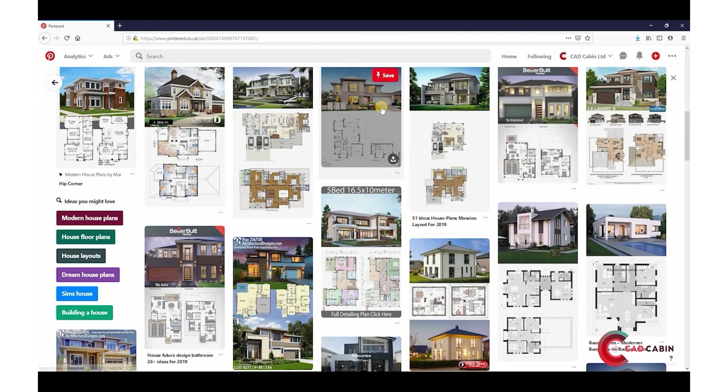In this video, we'll try to copy a design from Pinterest and make your own house plan in this software. Go to Pinterest.com and search keywords like two-story house plan UK. Search for a pin that you will copy and use as reference in designing your own home. Find one image and we'll start duplicating the design into our software. Let's say you want to copy this design easily.

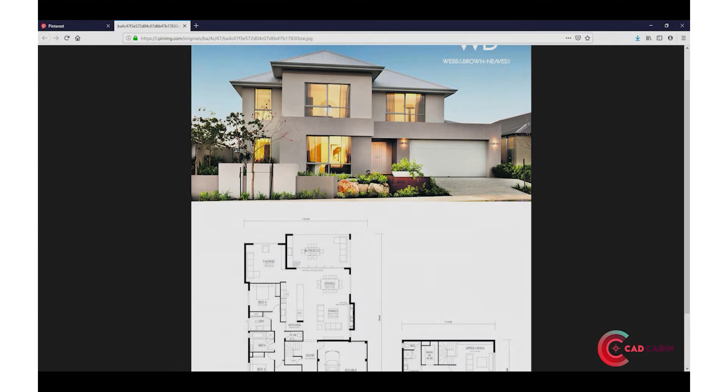This is a two-story home with carport. Now we'll switch to the program and start by drawing the plan. To start, let's draw the exterior walls.

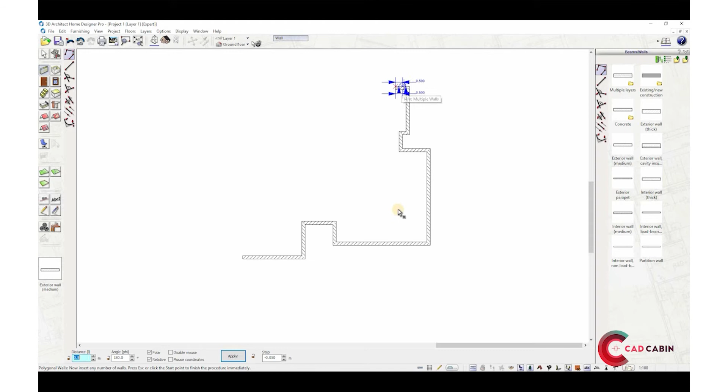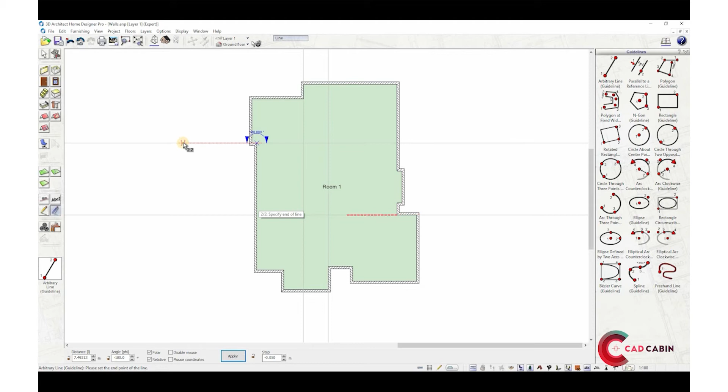As you can see, I used guidelines to align the walls, ready for interior walling. To use guidelines, click on the Guidelines tool at the lower toolbar, then set the reference point. You can rotate the line 360 degrees, or either vertical or horizontal. Another click to fix the guideline.

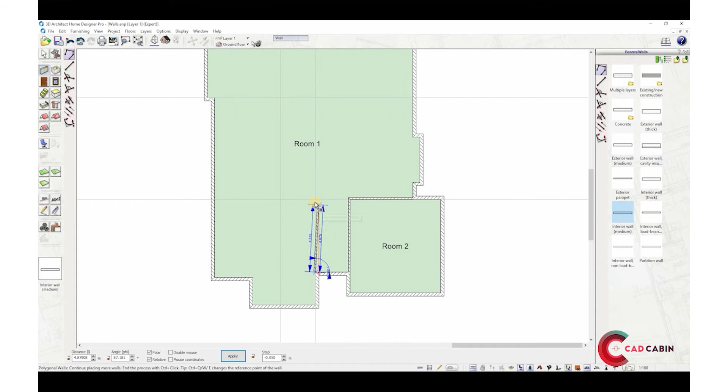After creating a large room, next draw the interior walls. You can add your bedrooms, bathroom or any room according to your desired size. Just click on the wall starting point, drag and click to end the wall. Continue until you have completed all the interior partitions.

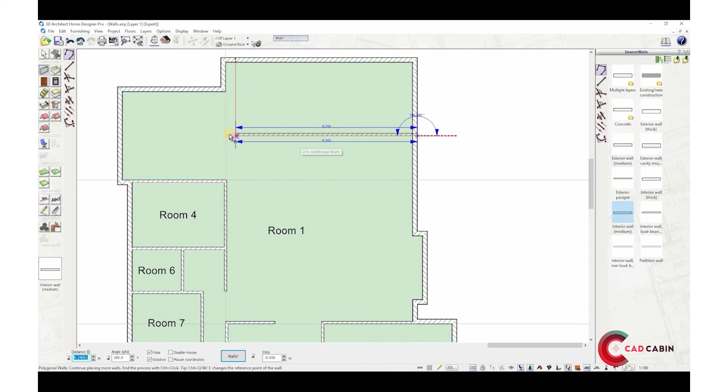Select the Doors tool icon and select a door from the catalog on the right. For the main entry door, let's use a double panel door. Select the door type, then we'll use the midway input option. To add this door, right-click on the first reference point, then another click on the second point. This will automatically locate the door at the center of the two points.

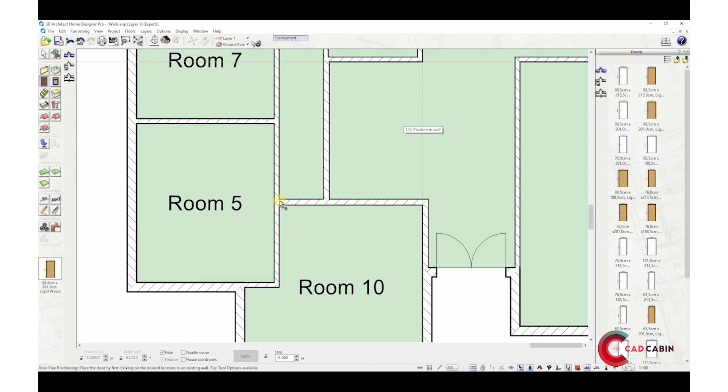Now add all the other doors. You can either use free positioning, which allows you to set doors at any location without any reference points, or by a set distance. This option allows you to enter a distance value at a chosen edge.

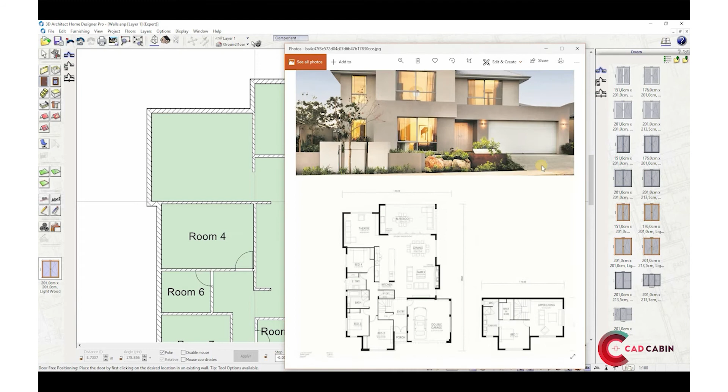Let's add windows similar to the image. First, select the Windows tool icon, then find a window type that is similar to the window in the image. Let's pick a plain window with a glass pane below.

Then we'll change the value at the component options at the top bar. You can change the measurements here. Let's change the sill height by first clicking on the sill height at the illustration. Based on the image, the sill height there is a bit low compared to the standard, so we'll change the default value to 0.5 meters.

After that, change the bottom pane height by clicking on the lower glass pane in the illustration, or select the drop-down menu, then change the overall height. This will determine the upper glass pane height. And lastly, change the width.

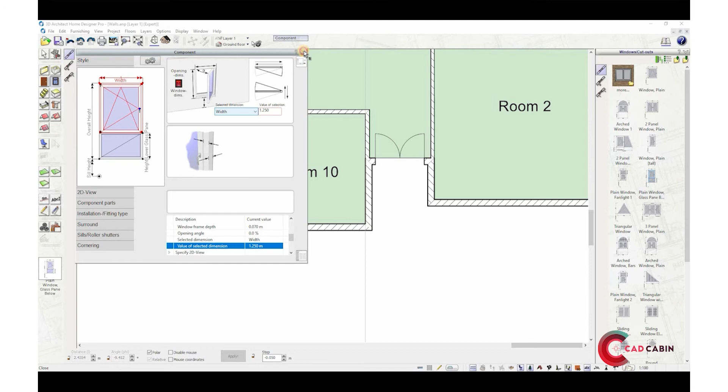You can now insert the windows. Let's use windows at set distance input. Once selected, open the tool options at the top bar. Select the edge where you would like to start or the reference, then overwrite the distance value.

In this example, we'll set it to 0 and right edge. Click on the center of the wall, then click to position the window. Hover the mouse to set the window opening and another click if done. Let's do this again on another window panel.

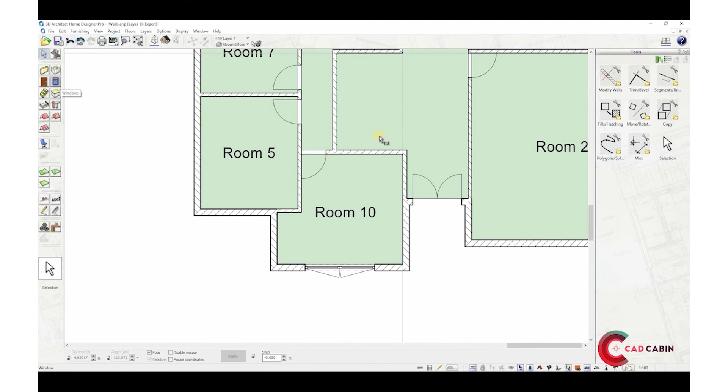Add all the other windows on the ground floor.

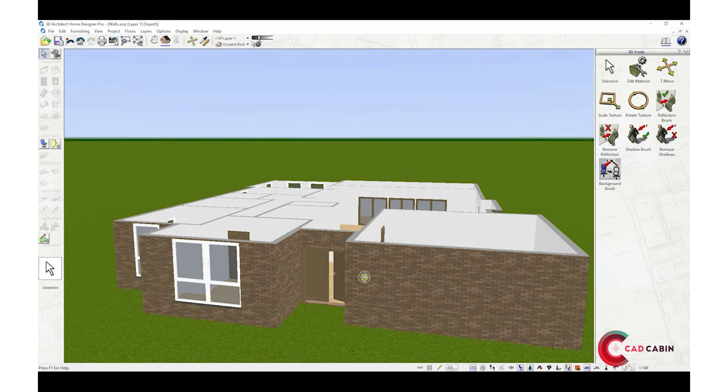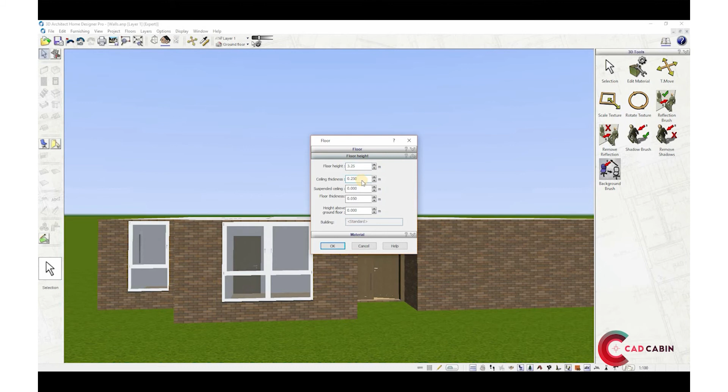What if we increase the floor height? To do this, select Floors at the main menu, then select Edit Active Floor from the drop-down. A pop-up window will appear where you can change floor name, floor height and material. Let's change the floor height from the default 2.75 to 3.25 meters. Then click OK to save changes.

The ground floor height will increase as you can see in the 3D.

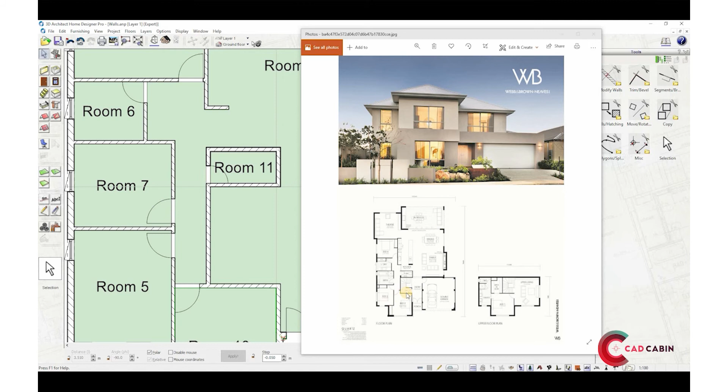Before we move on to the first floor, let's add a staircase. Let's add a U-shaped winder stair similar to the floor plan that we are duplicating. Select the Stairs tool, then select U-shaped winder staircase in the catalog.

To insert it into the plan properly, click on a starting point. We'll select the edge of the wall in this case. Then another click to set the depth of the staircase area. Lastly, another right click to set the length of the overall staircase. This automatically generates the number of steps and the tread depths and rises.

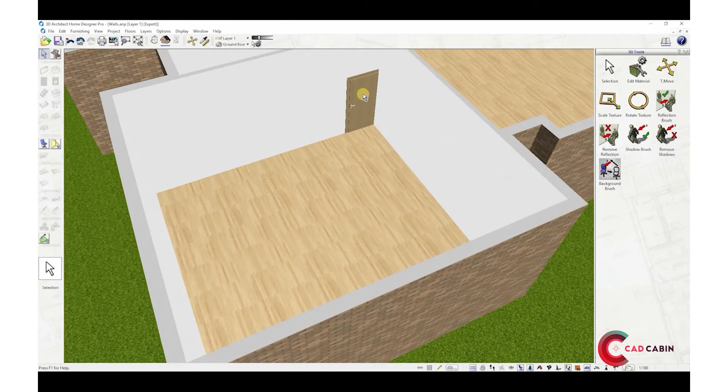If you want to change the stair dimensions, step sizes and height, select the staircase and go to the Stairs tool option at the top bar. Once selected, you can start changing the stairs construction type, or step sizes from the editable options.

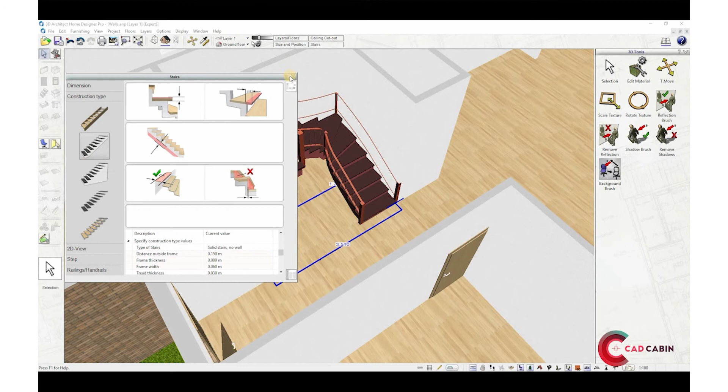To add an upper floor, go to the Floors menu and select New Upper Floor, or you may select the Ground Floor icon and select Add New Floor. Before adding another floor, options are available to change floor name, floor height, material or copy walls. Change floor height if necessary. Then you have the option to copy walls from the lower floor to the upper floor. In this example, we will not choose to copy the walls and we'll just draw exterior walls manually.

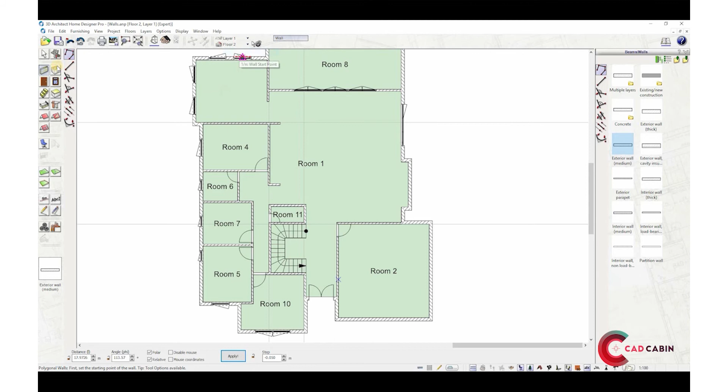By adding the first floor, this automatically changes the active floor to the new floor. You can now draw exterior walls and interior walls here.

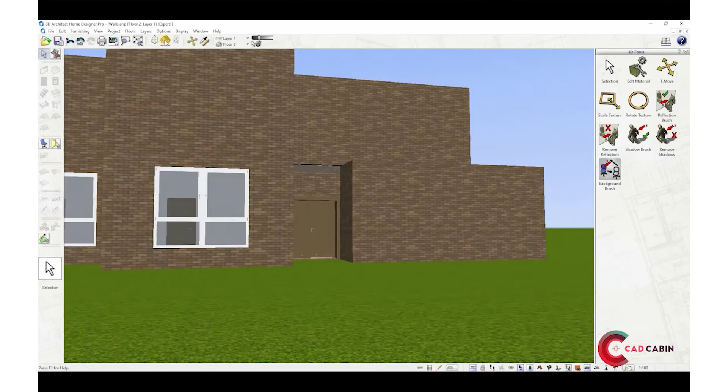To hide the inactive floors, say the ground floor, go to the Floors menu then select Only Active Floor is Visible from the drop-down. You can now only see the active floor which is named Floor 2.

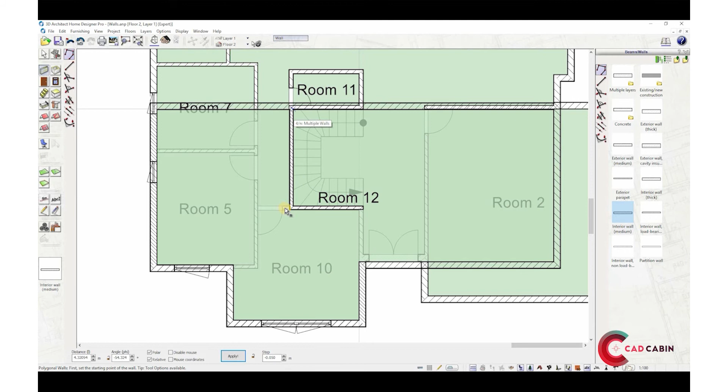Now add interior walls, doors and windows for this floor. Tip is to make all floors visible in case you want to align walls and windows with the ground floor.

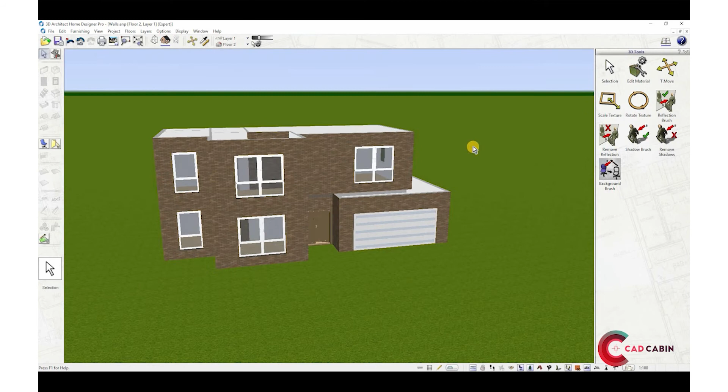Toggle to 3D furnishing mode to see the three-dimensional view of the plan. To complete, we will now add the roof. Similar to the image, we'll use hipped roof.

Let's go back first to 2D view or the construction mode. Select Roof tool icon then select Hipped Roof from the catalog. For the roof input, we'll use rectangle option. We will start with the highest roof.

Before that, to clearly see the first floor as our reference, we'll change view to only active floor is visible.

Before drawing roof, we'll change some items at the tool options. Click on the tool options at the top bar. At the pop-up window, we'll tick Insert Attic Roof and create new floors, if the gable of the roof extends beyond the top floor. This will automatically add the attic and extend its wall according to the roof pitch.

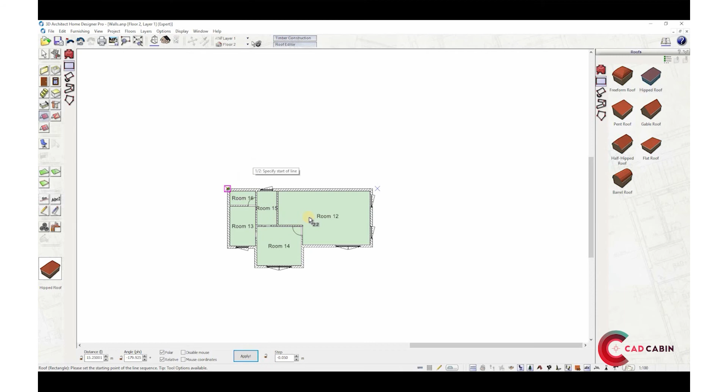Now that the options are set, click on a wall corner, then pan to its opposite corner, creating a rectangular roof. If you have an irregular shaped roof, use polygonal input. As you can see, attic and roof are added in the floor list.

Now, let's add the front roof. Click Hipped Roof again and select Rectangular Input. Click on the first corner, then select the second opposite corner. Make sure that the roofs overlap, so click on a point where the roof will be overlapping each other.

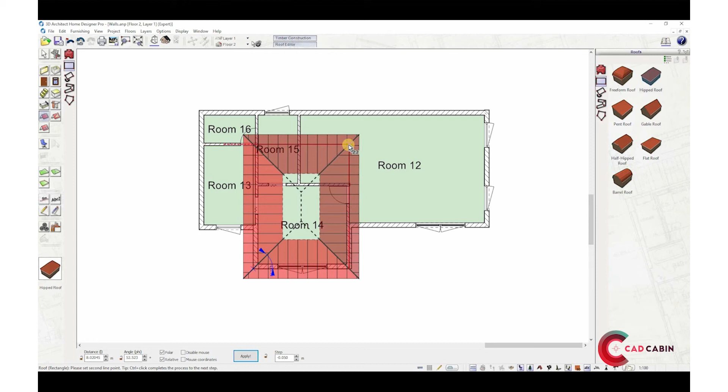You may select Roof as active floor to see the roof configuration you made.

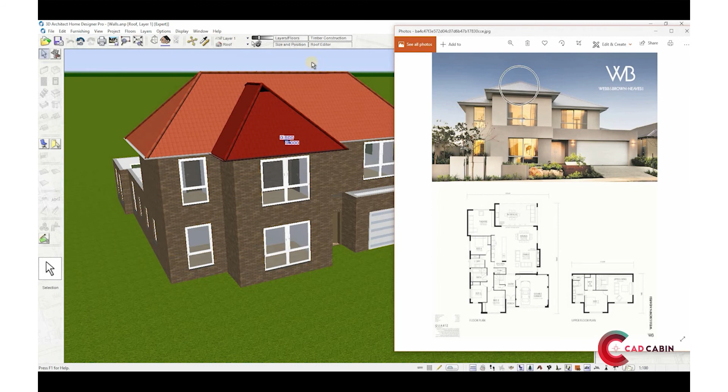Then, let's change the roof pitch to a lower angle. To change, select the roof to configure, then select Roof Editor from the top bar. This will open a window. Find roof pitch at the options or select the angle symbol at the illustration and overwrite its default value. Say 20 degrees. Then close the window.

Change the other roof pitch. This time a higher pitch than the 20-degree pitch of the first roof. We'll overwrite to 30 degrees.

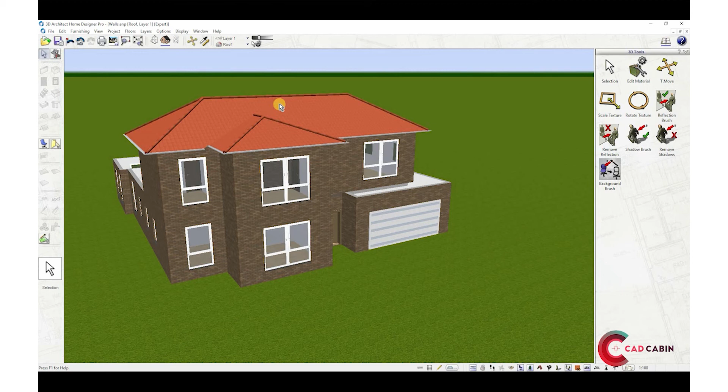If you have overlapping roofs, the best way to merge is to select Intersect Roof tool. Select the two overlapping roof. Then, select Options from the main menu and choose Intersect Roof. This will cut through each other where they currently cross.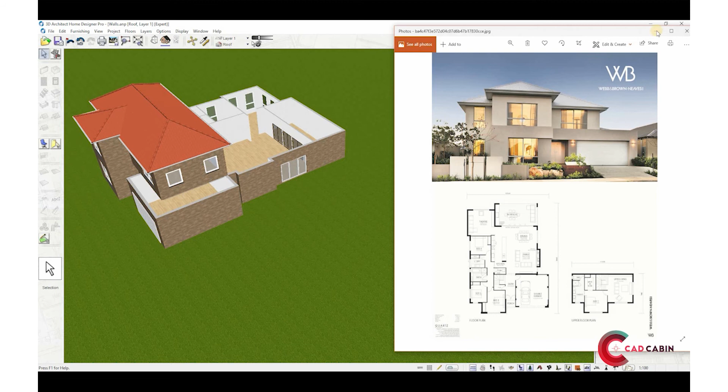Add the other roof also. For this carport roof, we'll use Flat Roof. To add this roof on a ground floor area, make sure to select Floor 2 or First Floor as the active floor.

Select Roof tool, then select Flat Roof from the catalog. We'll use polygonal input since we will cover a polygonal shaped area. Go to Tool Options and tick Add Roof to Current Floor and uncheck Create New Floors, since we don't need an attic here.

You can now draw the polygonal roof.

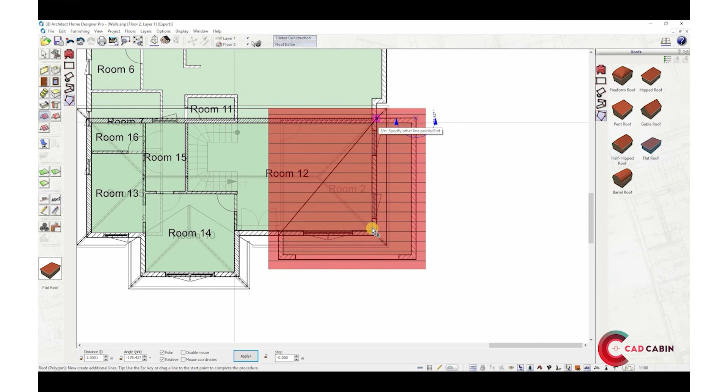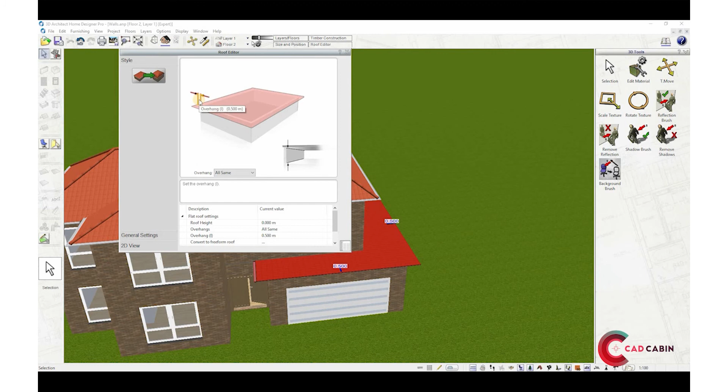Select the roof and go to Roof Editor. We will remove the overhang. Select Overhang and overwrite default value to 0. Then add the other roof.

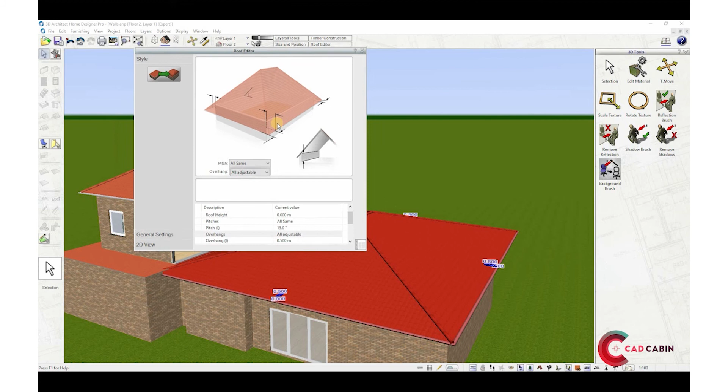We now have already a similar home design with the image we picked at Pinterest. As you can see, the materials and finishes are in default. You have the option to change this by using Material tool.

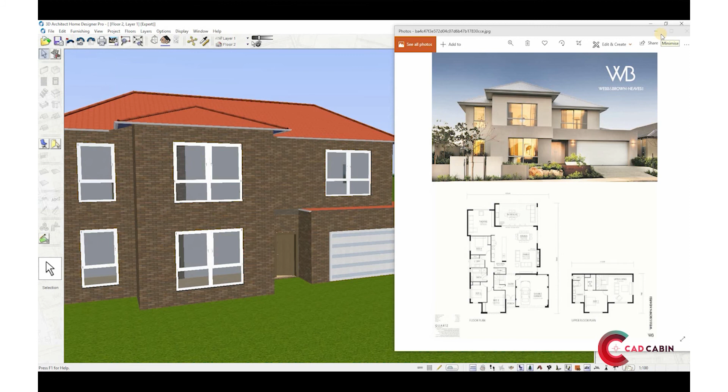To change the default lighting, go to View at Main menu and select Lighting from the drop-down. You may choose from different light setting. Let's choose daytime.

To change materials or finishes, if you are in 3D mode, select Material icon. You will see Catalog of Materials at the right bar. There are many options from the inbuilt catalog for the finishes. Explore the folders and find the right category and material. Select the preferred material and click on a surface to apply.

Change materials according to your design.

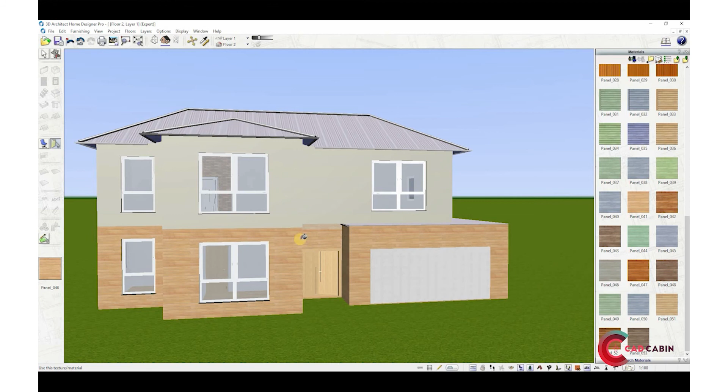To add a realistic shadow, go to View at Main menu and find Shadows at the drop-down. By selecting Shadow, the software will calculate the shadow casting, and after that, it will realistically show shadow in your model.

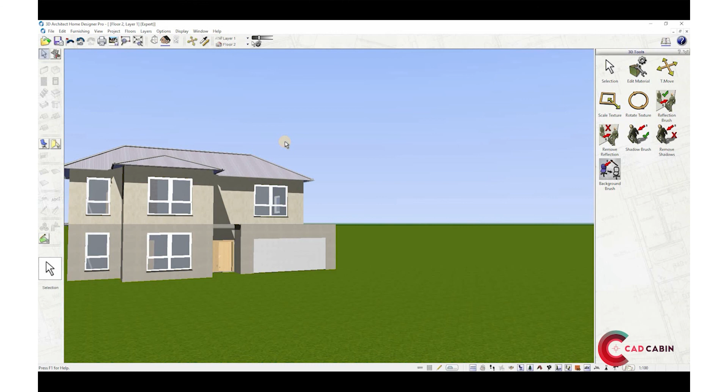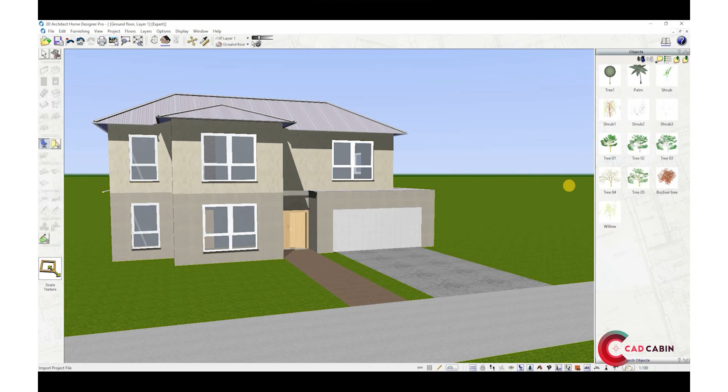To add objects, just select Objects icon from the toolbar. This will open a catalog of all 3D objects in different categories: trees, outdoor furniture and many more. To add into the model, drag and drop selected object and set by clicking on the preferred location.

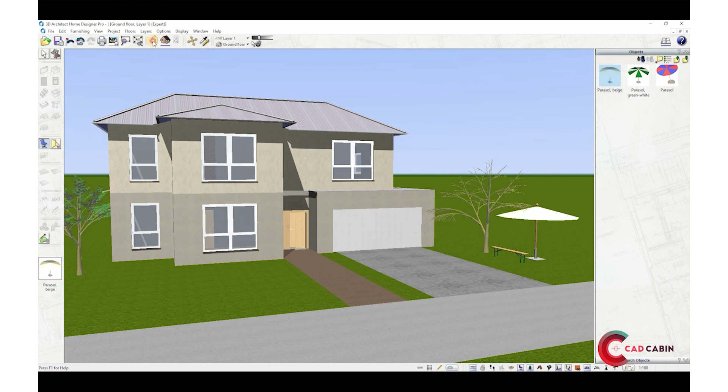You can also add interior objects into your design. Go to 2D or construction mode and drag and drop selected objects into location. You can choose from many preloaded furniture and fixtures in the catalog.

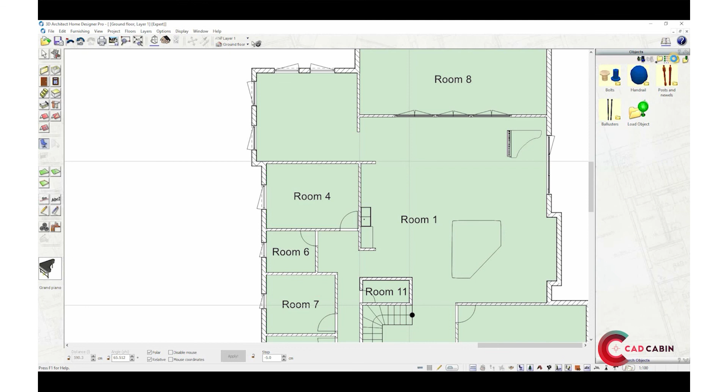In this software you can completely plan your own home at your own hands. Exterior or interior, at an easy interface.